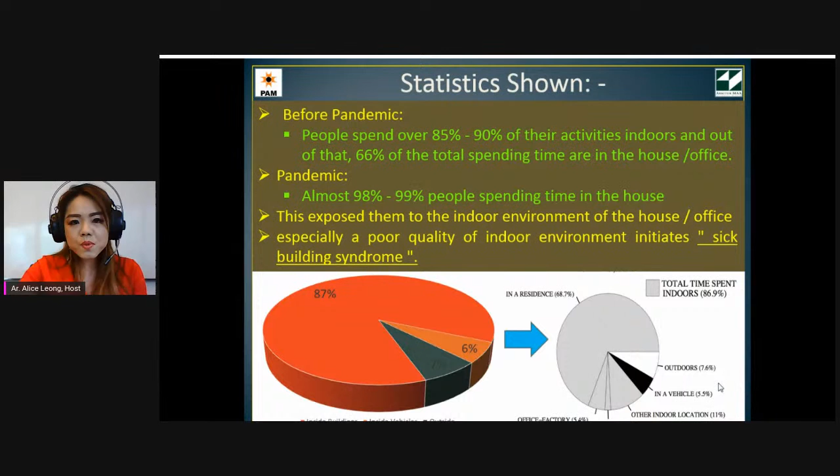So IEQ is called the indoor environment quality; it's a little bit different from indoor air quality, IAQ. We're talking about the environment, so it encompasses a much bigger scope around the area that we are living in. So let me explain that. Previously, we were maybe looking into 5 criteria that we have to control to make sure we are comfortable in the areas that we are occupying: the sound quality, the light quality, the comfort, the air, and the odour.

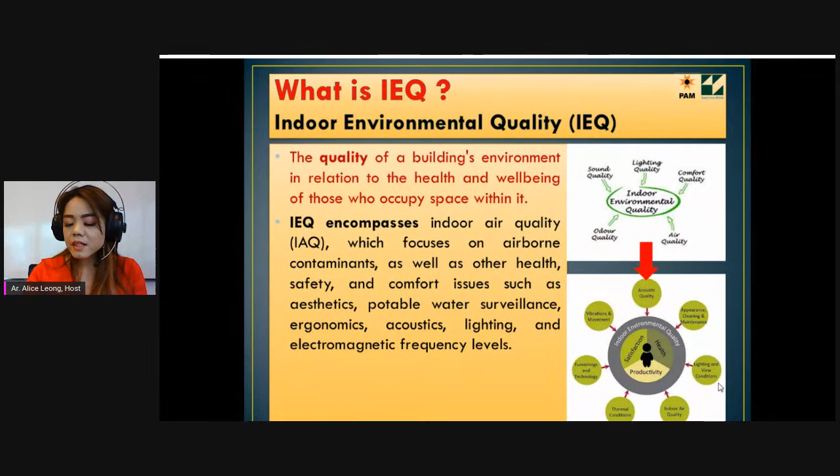So we also realize that people start to talk about including electromagnetic radiation in the IEQ, how to shield it away, because we know that nowadays with the technologies that we have, every single element, especially electronic items, actually comes with radiation, and it's just a matter of how it can create a negative impact towards our health, and so on and so forth.

So the impacts of poor IEQ, we know that previously it caused, and it still happens, that if you are in an environment with very poor IEQ, you will get skin rashes, sudden itchiness and fatigue, and then you feel asthma. You did not have asthma before, but suddenly you got it after that. And then eye irritation, discomfort, and then you have what we call sick building syndrome.

So sick building syndrome is when, especially in the office, one person catches the flu, then it's followed by a few more. You can see one guy get MC followed by a few others. That means the working environment or habitable area actually suffers from very poor air circulation. It's one of the elements in the IAQ. So improving the IEQ today is very crucial to help minimize the future impacts in terms of health risks, energy demands, energy costs, and also air quality.

So I've been putting in more elements because of this COVID-19 and many more things that alert us to wellness as a priority. Previously we captured daylighting versus the heat gain from sunlight getting into the living area, the views versus privacy: certain areas need to be more open to the external view, certain areas require privacy, and natural ventilation always versus external pollutants, insects and noise.

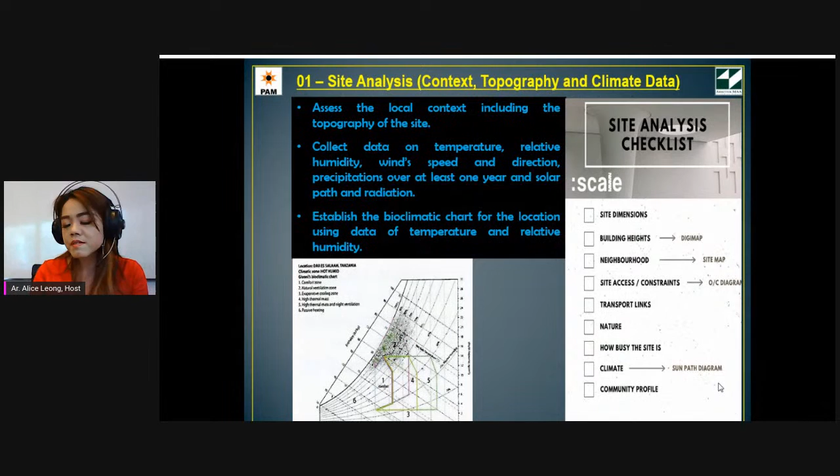But it doesn't mean that we can totally eliminate the air conditioning system. Especially in this modern era, our buildings have become more and more advanced, and things are based on the functions of the building. Certain areas really need a certain system to support them. So it's very subjective, depending on the functionality of the building itself and its purpose.

The next one, again, building orientation is very important. Of course, certain sites that you get are very limited and constrained in your choice of building orientation. You know very well that a building facing north-south is the best to get a more cozy area, and east and west are the areas that you try to avoid. But what if you can't? Then we have to put in other elements, which I will share in the next few points, that help to enhance the overall thing.

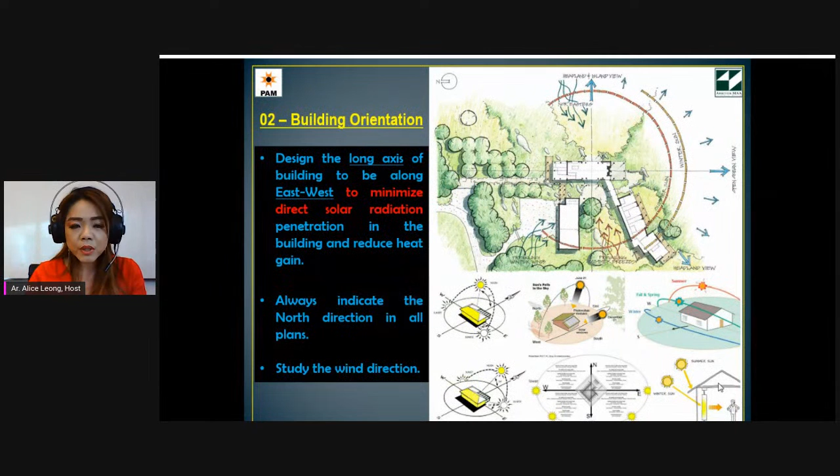When we talk about IEQ, we are not really just 100% focusing on the indoor. To get a very comfortable indoor area, you must take care of it from the beginning when the design starts. That's why I want to touch on this. From the macro, then you come into the micro. Then everything relates and will give you the result of a better IEQ.

For the building footprint, for those who are not designers, the footprint means that on the site given to you, you don't, like a typical layman, just build on 100% of the site that you have. I'm sure you saw a lot in the neighborhood. They keep extending their car porch, some even up to the boundary or even a little beyond the boundary. Practically, it doesn't really work that way. That's why we need to control the overall building footprint.

The best is always you build 60% and leave 40% as open area. That helps the overall environment of your living area, whether you have a landed property or a high-rise building. That's the reason the authorities always use the term plot ratio. Plot ratio is a way to also control how your building footprint is built.

It always comes with a purpose, and the way you arrange your building footprint also plays a very important role, so that you can put the nice private outdoor area in the orientation that you want, and certain areas you may want to make more of a public area. You can plant some trees or whatever it is.

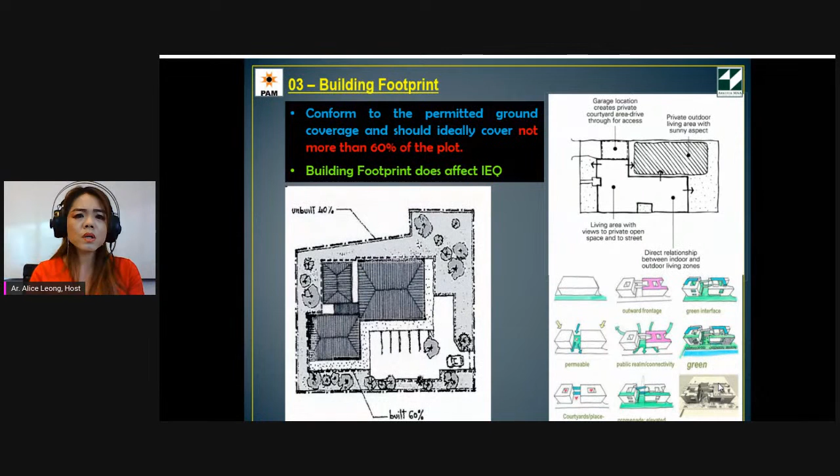At the same time, you actually create balance of the small little ecosystems in your own lot. So each of the lots itself plays by its own ecosystem. Before built, the ecosystem worked very well, but when you build, it is definitely affected. So the building footprints also come into the picture to balance off what nature has been doing, so that we try to minimize the so-called heat island effect as well as flash floods, all these natural problems.

So again, the shape of the buildings. In Malaysia, our criteria actually fall under the hot humid climate. We are not in a hot arid climate. Hot arid climate is more like certain countries like India. In certain areas, when it's hot, they're very hot, but at night the climate goes extremely cold. So in Malaysia, we are actually in the zone called the hot humid climate.

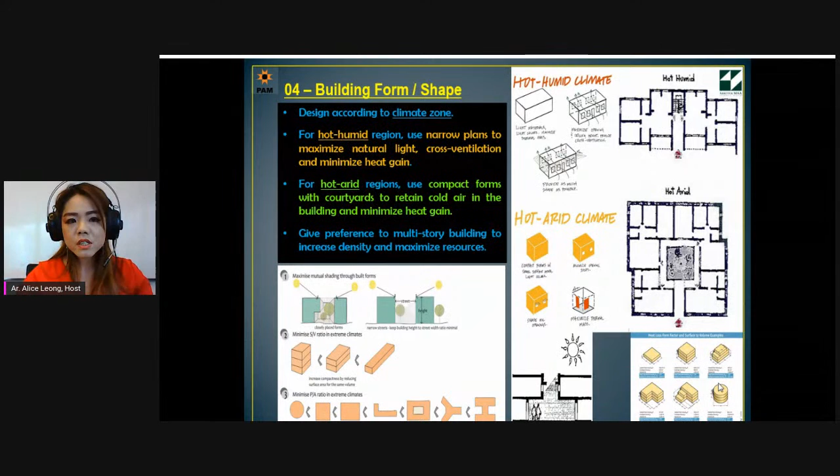So when you know very well and understand the climate of your own local context, then it's a lot easier for you to plan your whole entire building, how the openings should open and from which directions, and how the building shape itself should go, whether it should be elongated or more squarish, create more courtyards, so on and so forth. So planning the spaces within the habitable areas of the building is very important also.

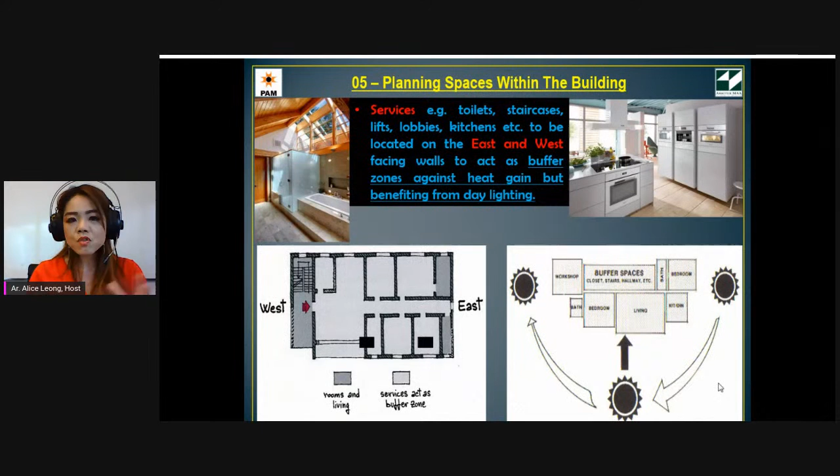Like I said before, the north and the south are always the areas that we want to occupy for more activities, especially in this pandemic. So normally when we design, we try to plan the areas such as the toilet, the staircase, the lobby, the kitchens, and put them in the east or the west of the building. Those act as buffer spaces, so that the north south area you can use for your living, the areas that you spend time in, you work in, and most other activities as well.

So again, coming to the openings of the building itself, we always emphasize that the ratio of the window to the solid wall cannot exceed 40%. It depends on your opening sizes. So if you can't avoid it in certain buildings and still need to use glazing or certain materials, try to use very high performance glass or high performance walls with a very good U value or R value that will treat the entire envelope of the building.

When the entire building envelope has been well designed, that will help to reduce the heat gain, the glare, and all the unnecessary discomfort elements into the areas where you actually work and do other activities. So then you create a much better indoor environment yourself, and you do not need to spend extra cost and extra design on this indoor area.

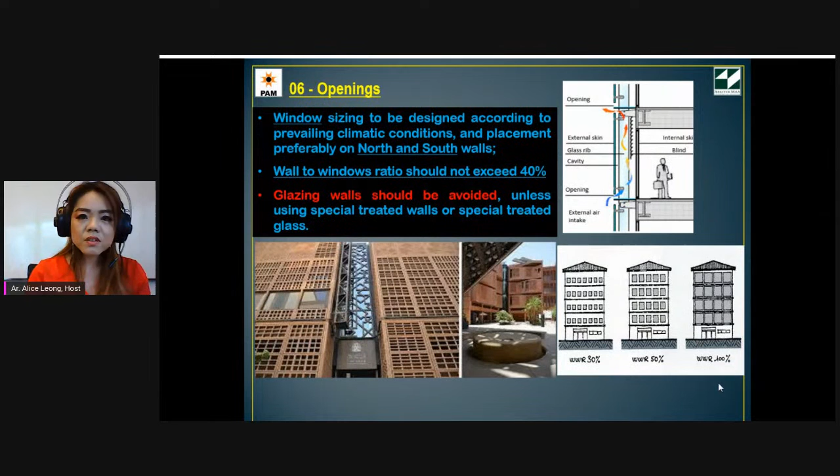It's just like your car. Those who have parked outside at 12 noon without a proper high performance tint on the car window, you open the door, you get in, and you know how it feels. It's really hot, like in an oven. So this is not what we want. It's the same concept for the building or the areas that we spend time in. We try to prevent the heat gain into the building, because once it gets in, it's very difficult to get it out. Prevention is always better than cure.

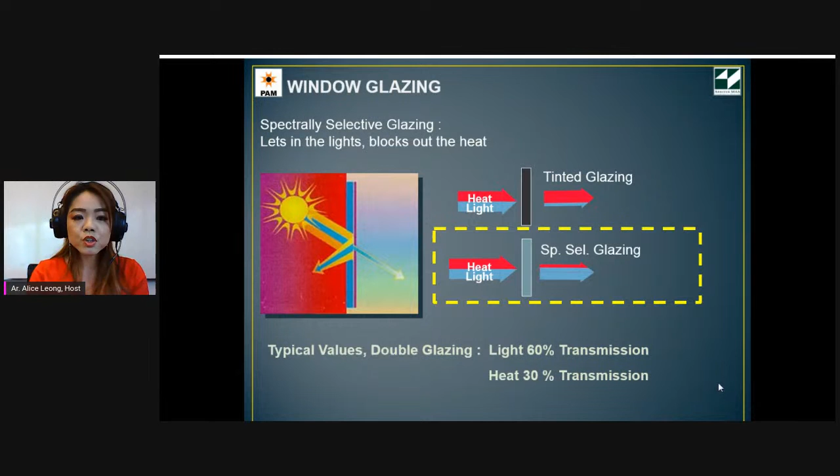So this is what I mean by high performance glass glazing. Whether the glass is tinted or not will give you different effects. By using high performance glass, you can eliminate the unnecessary heat gain into the building, but it does not stop the light getting through. We want about 60% light transmission into the building. That is free sunlight you can get, so you can reduce and minimize the use of artificial light during the daytime.

So another way is the way you arrange your glass glazing. There are many ways; it depends on the buildings, on the functionality of the buildings, what sort of performance glass you need to apply into the building. Certain glass itself is the same piece of glass, but you just turn it around and it gives you a different effect. In Malaysia, we are a hot and humid country, and we want the sunlight, as I said, but we do not want the heat, we do not want the glare.

So we have to arrange the uses of the glass in the directions that it will bounce back the heat to the outside again. But in a country that has four seasons, the same piece of glass they have to turn the other way round. Then they will get the heat into the building, especially in the winter. So it depends on which area, which country you are in. The design will be different. It could be the same material, but you just use it differently.

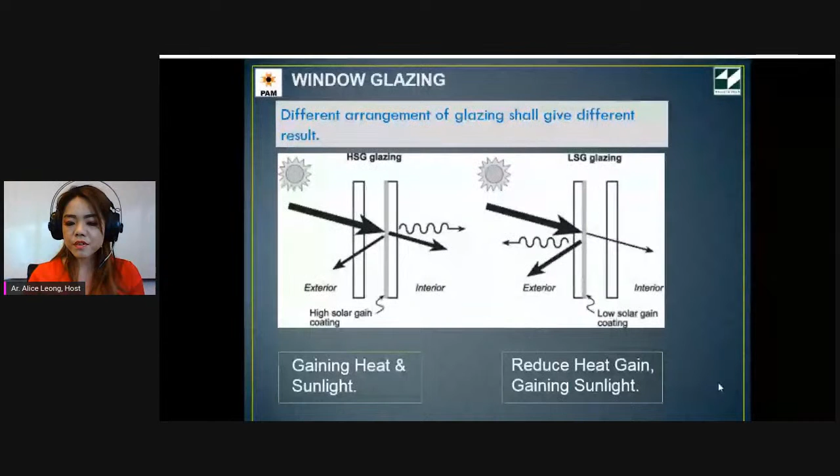So again, daylighting has been emphasized since a long time ago, when green building was introduced to Malaysia, I think about 10 or 11 years. But now in the pandemic, we are emphasizing it more. We want more daylighting, more sunlight, because now the time that we spend indoors is more than the time that we spend outdoors. We tend to do things a lot indoors already. I'm sure many of you are still working from home, taking turns 3 days or 4 days a week.

So it depends. When you start to work from home, you know which areas are lacking in sunlight, and you need to maybe switch on some lights to support your room. So from there, you know that the design itself, the room itself, is lacking in certain elements and criteria. So this is the awareness. I look at it more positively, that this situation actually makes us aware that the areas we inhabit need to be upgraded, so we can work and do our activities in a more comfortable environment.

So more daylighting, as I mentioned earlier, depends on your openings and the plot ratios of your buildings, and your orientation of the building, north and south. That helps in how you plan to harvest the sunlight into your building. But for facades facing the east and the west, you can have some shadings to eliminate the direct sunlight, the glare into the building, but you can harvest it indirectly into the rooms. That will help to reduce the irritation of the glare in the rooms.

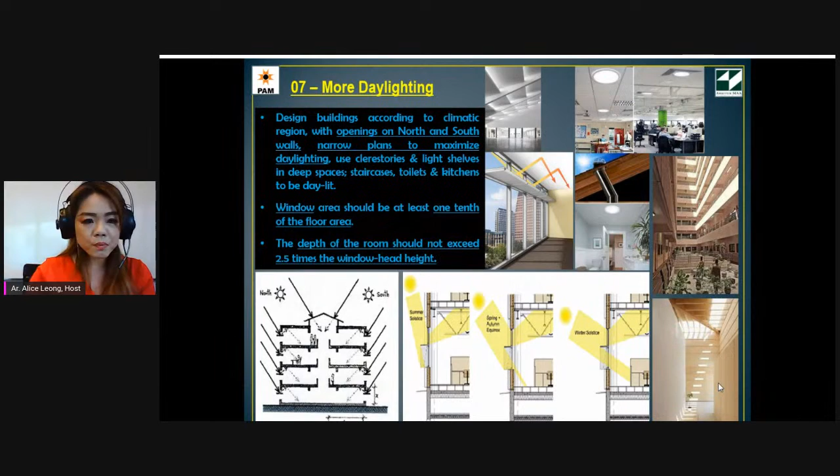So solar protection, in other words, is also called shading, or we call it a fin. It can be movable, it can be fixed. Other than that, we can also replace it with some vertical and horizontal green walls. Now you can see it's getting more and more common in our surroundings. But in our habitable areas, we really have to think about how to implement these elements wisely. It's not just aesthetics; the aesthetics must come with value when you install it correctly and it gives you the correct function.

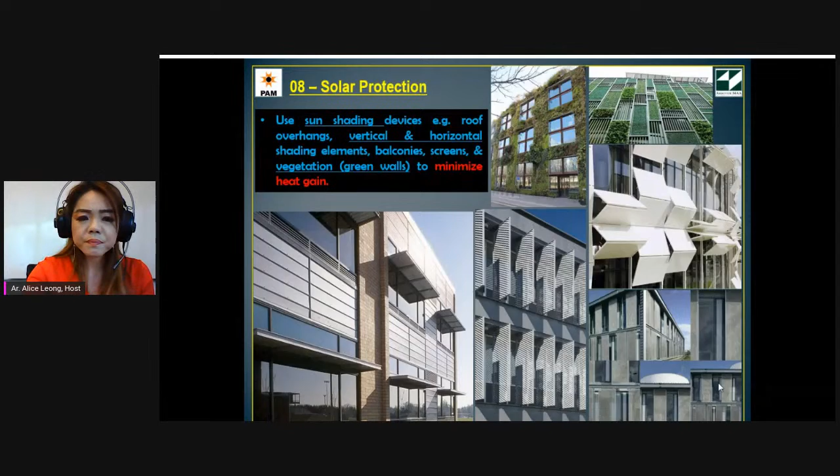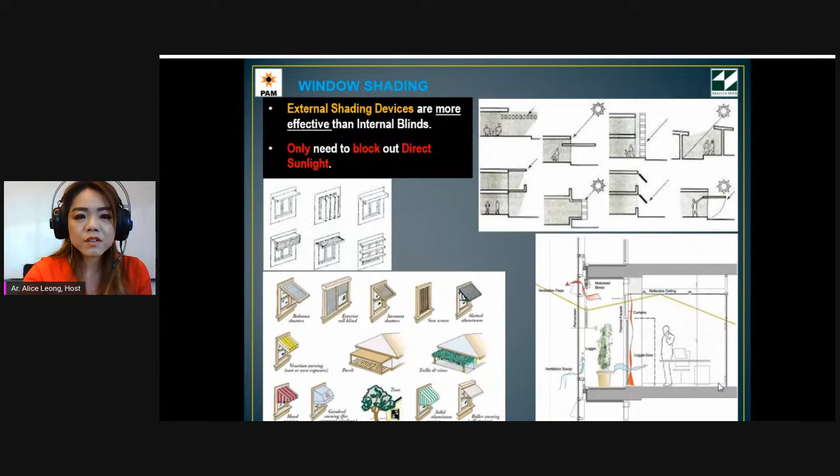So window shadings depend on how you arrange them in the openings of the buildings, and also the orientation. On the screen, you can see there are many ways of doing that. I'm not going to touch on that because it comes into the design details. The next one will be enhancing the natural ventilation, then later followed by others.

So in enhancing natural ventilation, we are not just talking about the window openings or the wall openings that bring cross ventilation of the hot air and the cold air. At the same time, we also have to include the roof itself. For houses, a lot are still using the pitched roof. So make sure the roof itself is a ventilated roof, meaning it's a breathable roof. You can also help by putting in some insulation.

So with insulation, outside there are many, what do you call it, thin layers of foil insulation that, I'll tell you, doesn't work at all. Even the insulation, if you put about 50mm, it won't really give you that effect. I've been visiting some housing areas where they really put insulation thickness of about 150mm.

I think that will really give you a perfect cool effect in the areas. I'm sure you've experienced this yourself, or maybe in some of your friends' houses, especially when they've done renovations. I've seen a few cases and experienced it myself, where they end up spending so much money on nice extension renovations for certain living areas, but in the long term it becomes a white elephant and nobody uses that area.

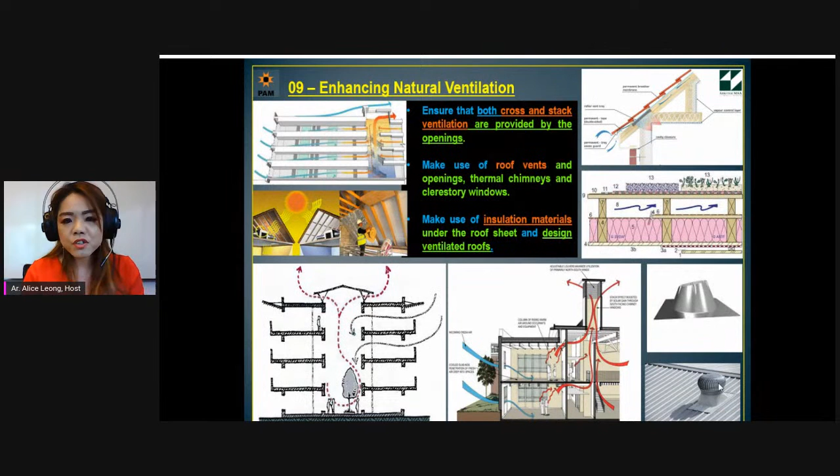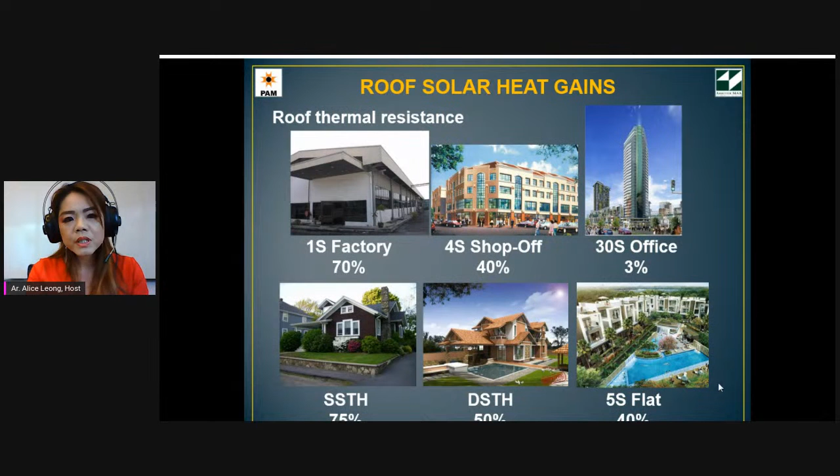The roof solar heat gain depends on the building. If you have a factory, shop lot, or landed property, we always emphasize that your roof coverage area is huge, so your roof needs to be insulated. But if you have a high-rise building, very slim and tall, the exposed surface of the entire building to the sun has to be treated, and of course the roof coverage becomes smaller. These are the percentages we always use as a guide for design, so you'll know that where the roof coverage is big, that's where you should put in the effort to insulate the entire roof.

Cooling itself is not just about using natural ventilation, we also have other elements to help enhance the entire living area as well as the IEQ. We can use water bodies to cool down areas, not just externally but also inside your living area. But you have to use it very wisely - it's not that you simply put in a water feature and it gives you the effect.

I've seen some areas where they've implemented water features, but the effect is not cool at all - when you pass by, you don't feel the cool effect, but the opposite. So before putting in any water features, especially in externals like big huge parks, I suggest a proper and thorough site analysis, and also the ecology and topography around has to be studied in detail, looking at the building surroundings as well as the climate itself. Because each building, especially high-rise buildings, when you build it up, it will affect the ecosystem itself.

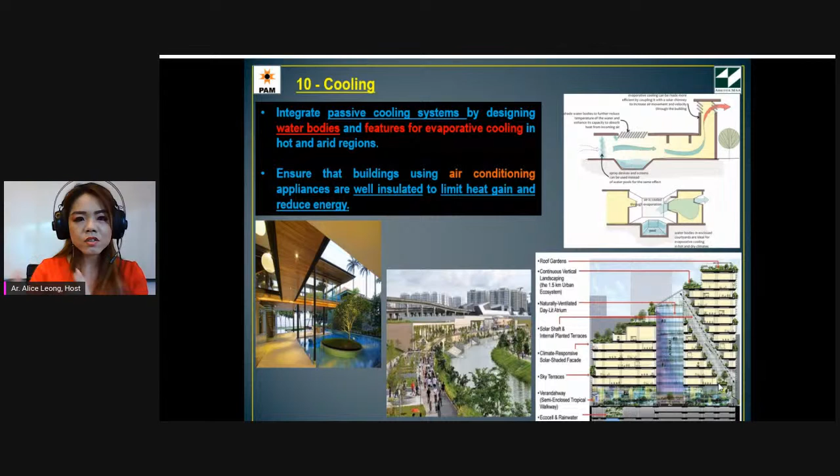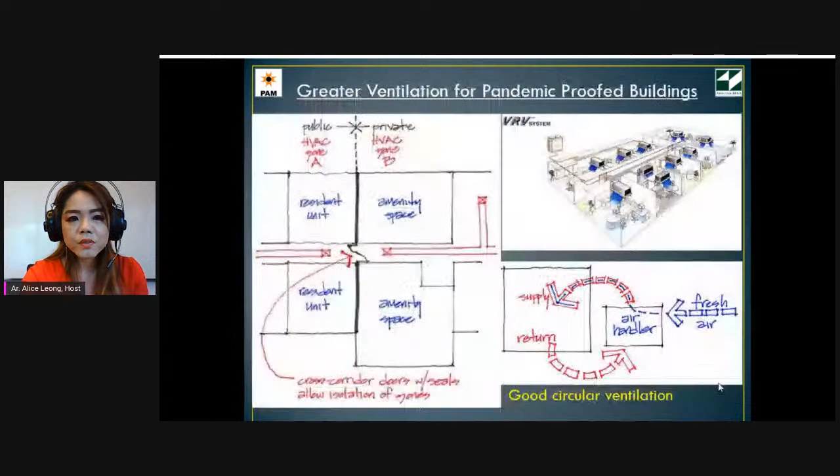So this is the way how some of the concept that you can use it for your indoor area. And of course, besides emphasizing on natural ventilation, we also have to think of the areas that you can't avoid, but have to use some aircon systems or artificial systems to help enhance the indoor environment quality. So in this pandemic situation, we have to really emphasize on using greater ventilation systems. I call it high performance HVAC systems for pandemic buildings. The concept of it, I think Damien can share later, because he's much more expert than that, he can explain much more.

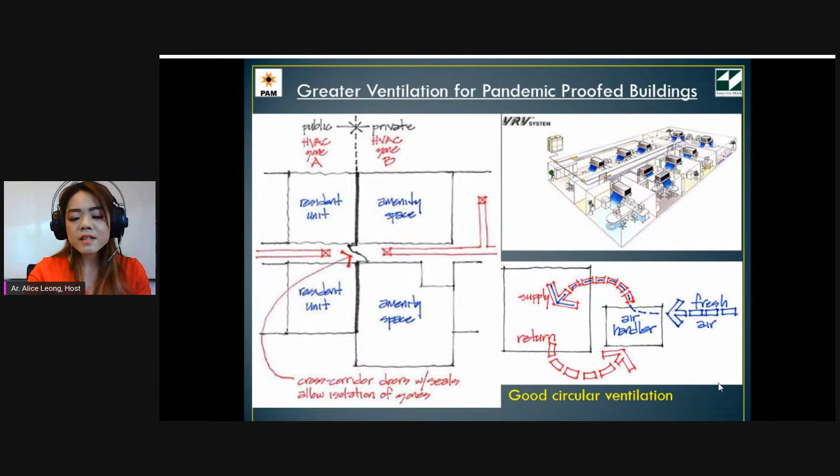So I'm just basically touching on that. This is roughly a concept that is really emphasized, it works as well as our passive design. It's always emphasized on good circulation of your ventilation, whether you use technology to help circulate the ventilation or by natural crossing. The planning and design itself must be right, so then you get the right effect to your entire living area.

So the next one we are looking at is the building envelopes and the material itself. Previously we've been talking about how we emphasize using material which is certified and approved by the local authority, especially like timbers, and we emphasize a lot on recycled and reused material. But right now, because of this pandemic, we've started looking into other enhancements or add-on points, such as it has to be easier to clean, wipe, and sanitize.

When you are staying in a certain area, sanitizer has now become part of our daily elements that we bring all around. You wear gloves, you wear masks, all these things. So areas like that, and equipment in the office, the material we use for our daily life really has to be considered, including your living area. So we always look for materials that can help us ease our maintenance. We always call it easy maintenance, easy to clean.

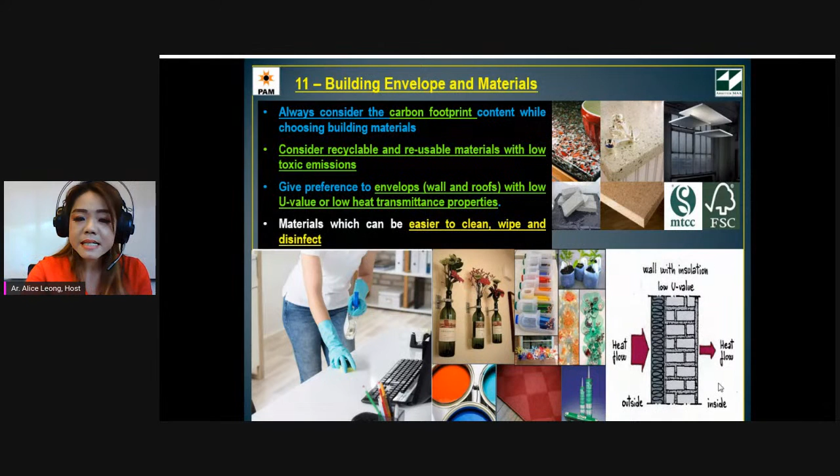So of course, when we talk about IEQ, we also talk about very good acoustics. It gives you a very comfortable environment. When you talk or do certain activities, the voice and whatever will be properly absorbed into the materials itself, rather than bouncing back and giving you echo effects.

Another thing is from inside also to the outside, the external finishes. So the finishes for external and internal are equally important. This includes not just the material itself but also the color you choose. We always emphasize going for lighter colors. Lighter colors in theory bounce back most of the radiation or heat to the natural areas. But if you use darker colors like black, dark gray, and anything darker, you absorb more heat into your living area.

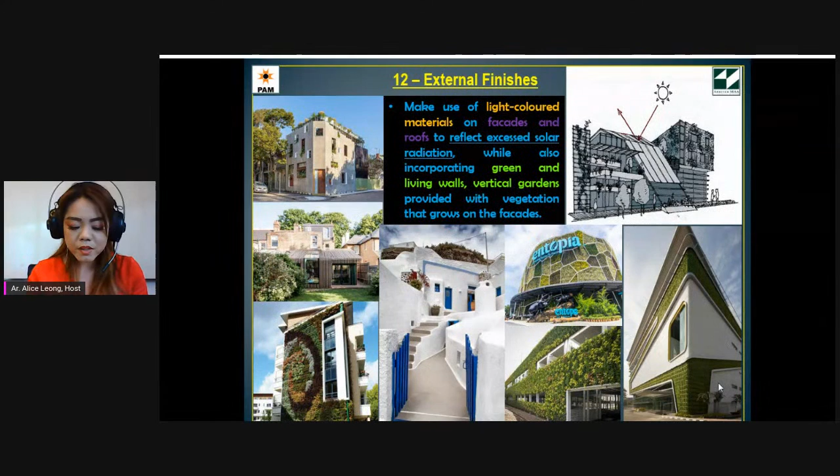That is the thing we do not want, because it's just like wearing clothes. If you wear black clothes and stand under the sun for, I bet, 1 minute, you'll feel the whole heat actually absorbed into your body. That is the discomfort we want to get rid of. So the same thing applies to our buildings and living area as well.

Same for the roof itself. Most of the time we also use what we call solar reflective materials, either for the roof, for the wall, but also for your landscape area, especially the hardscape area, meaning the pavers and pathways that we walk on. These are materials we always select, and we always advise other consultants and construction players to try giving a combination of brighter material. If you want some coloration, say gray, we want the matching coloration to contain more of the whiter elements than the darker elements.

So for the roof itself, same thing, we always opt for brighter color, light gray versus dark gray, things like that. And for your wall, we always go for lighter colors, white or very light gray, rather than very dark colors. Darker color may give you some designer feel, but you also have to think of heat absorption into the building. So if you have these kinds of things, then we have to think about how to actually bring the heat out from the building envelope before it gets into your habitable area.

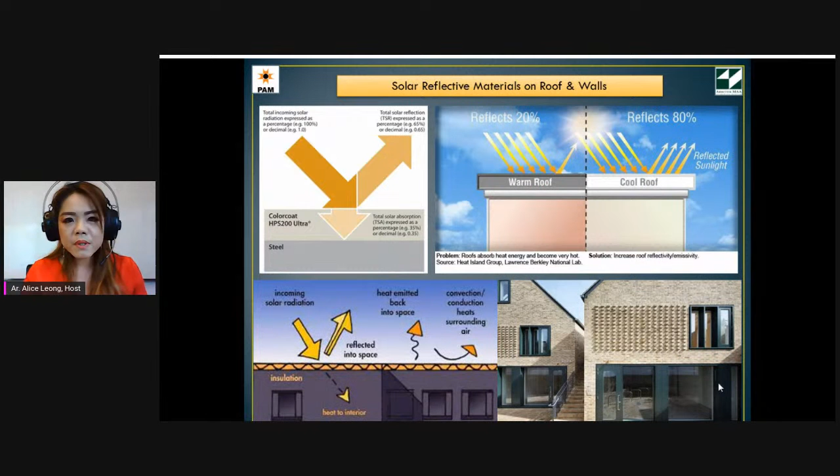So again, come to renewable energy. Solar actually is not a new thing. It's a very common item, but it's about how we play our part smartly to use solar panels, not just to help us save electricity, but to smartly implement solar panels in our house area, office area, or any other commercial areas. It helps in terms of cost cutting, and this element itself is not so expensive compared with years back.

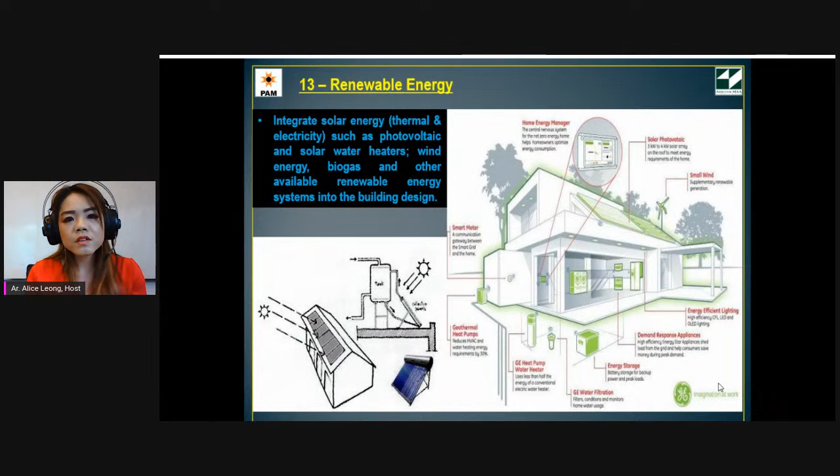For the electricity tariff, we can always talk to the TNB authorities to see how the benefits, grants, or incentives can play along.

So water is also another very important element, especially in the pandemic. Last month, almost the entire KL Klang Valley suffered a shortage of water, especially during this pandemic where we emphasize you have to keep your hands washed, hygiene and all these things. So imagine without water, what are you going to do?

So water plays a very important role in our daily life, in the IEQs as well. I break it into three criteria: a rainwater harvesting tank, how you harvest your rainwater and use it for certain daily errands; recycling of grey water, which helps save some water bills and costs in a more sustainable way; and being smart to select high water efficiency appliances.

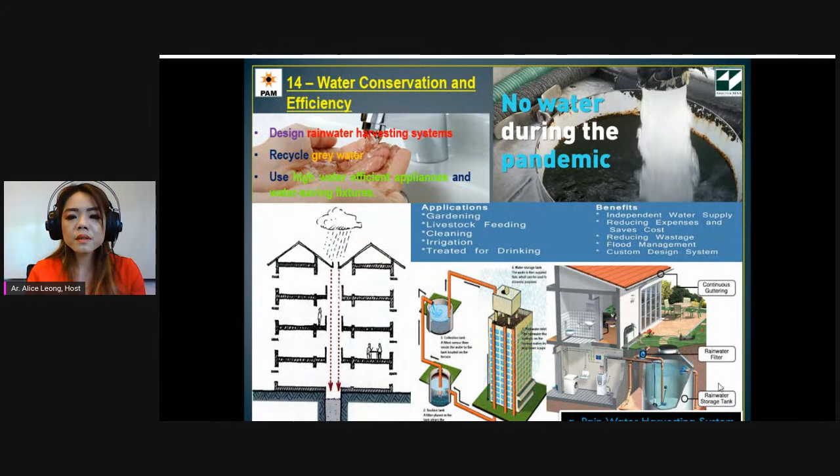For the rainwater harvesting system itself, we need not spend a very expensive amount for this particular system. In some buildings, especially PAM building, we also have this rainwater harvesting system, and it's proven that when most areas have no water, the building itself has sufficient water for other usage. For houses, we can also use that, but by incorporating good quality water filtration, it can be used for other better activities.

So grey water is the water you use after washing your hands, cleaning your plates, or taking a shower. This is water we normally discharge directly to the externals, but we can recycle and use it for other purposes. For instance, you can recycle and use it for irrigation, watering your plants, things like that. After washing your hands, the water isn't so dirty, so you can use it for cleaning your car or washing the floor, whatever it is.

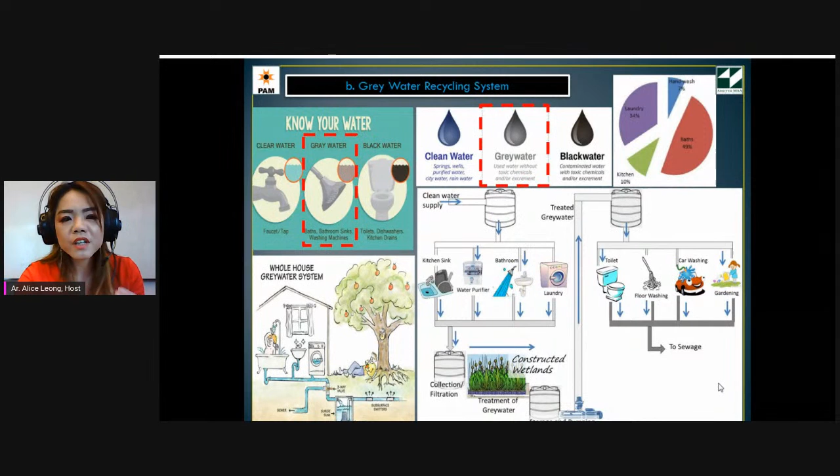It depends on how you're using it, but definitely it's not for drinking. Grey water is definitely not for drinking. We normally use it for irrigation and other purposes where it's okay, not needing to be 100% clean water.

The use of very high efficient appliances also helps you save in terms of water bills.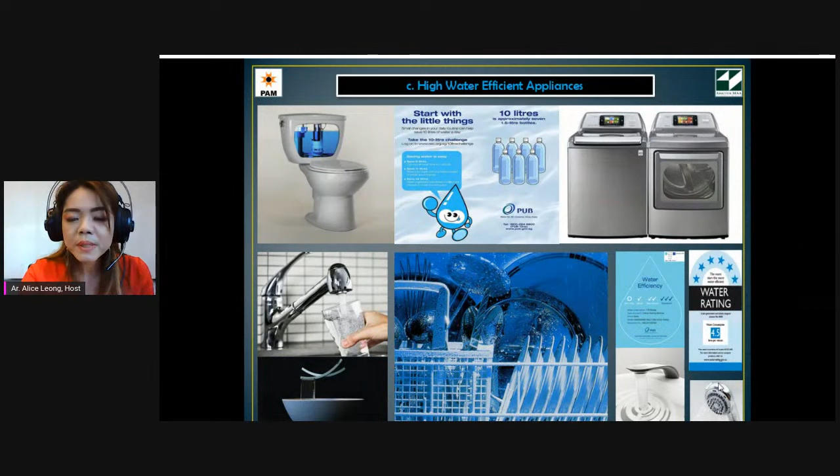In this pandemic, everybody suffered, not just from movement restrictions and distancing, but the biggest impact on the entire world is our economy. Everybody is going through a very tough life, so we try to use every item very smartly. Every single penny counts, including water. Even though water bills in Malaysia are still considered cheap, we have to use it wisely so we don't waste the resources we have.

The last point will be the efficiency of solid waste management. We're talking about rubbish, and I'm sure during the lockdown or MCO period, you realized how much waste was produced by each family household. When your garbage bin outside is full, you're waiting for the collection truck to come. These are the systems we want to upgrade already, so now we're talking about a lot of things being done through technologies.

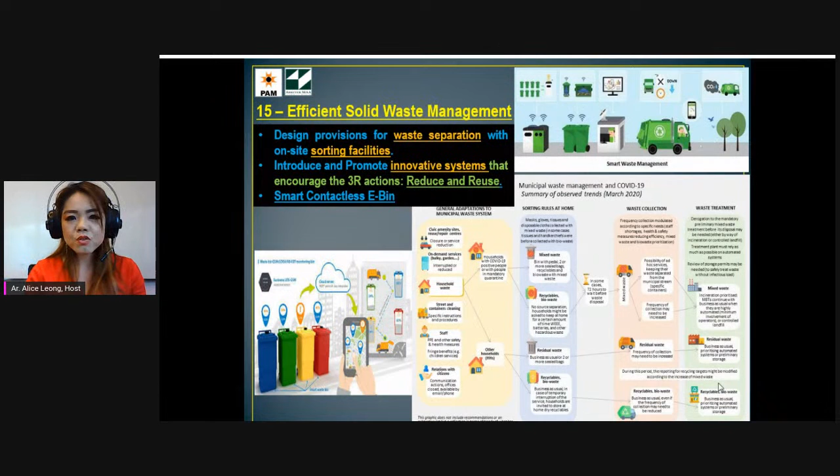We are talking about contactless e-bins. Other advanced and developed countries have been using that. So I think in Malaysia, we should also look into this criteria so that we can manage our waste smartly, especially for people who stay in condominiums. So the garbage rooms, how you transfer your garbage into the refuse chamber is very important. And then from the refuse chamber itself, how your garbage can be transferred to the truck.

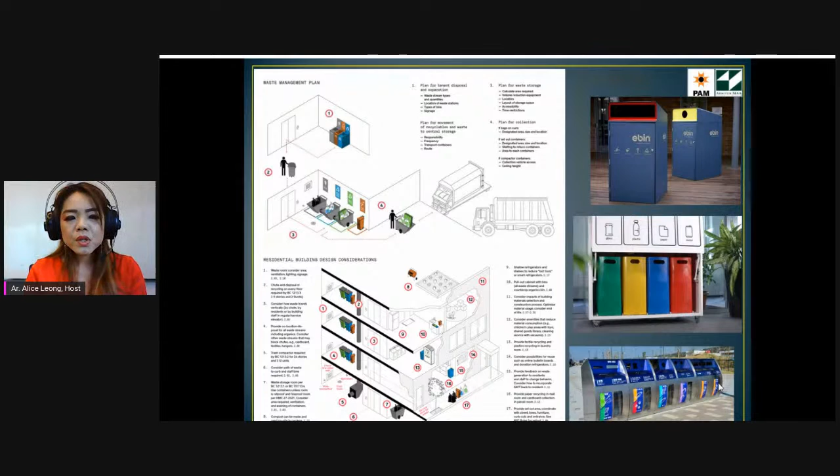So some technology has been coming into play, IoT, as I mentioned. So this is the area where we have to work together with the stakeholders as well as the policymakers to enhance the entirety of our country here.

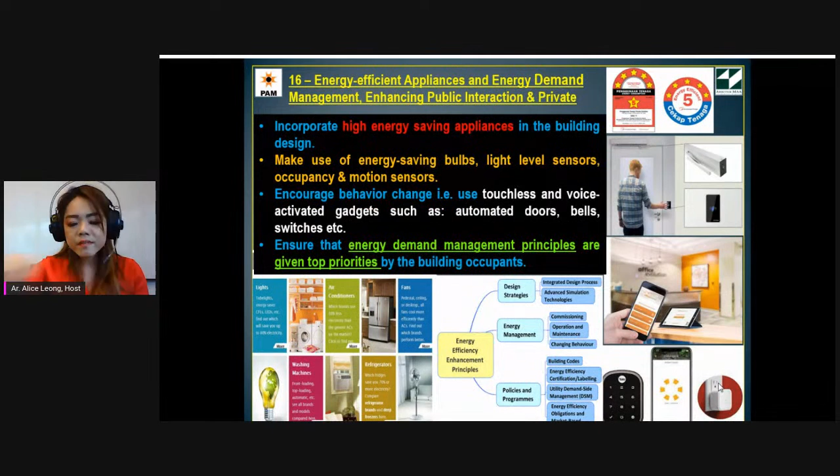The next one, last but not least, is the electrical appliances. Right now, because of this pandemic, we are also talking about contactless, touchless; as long as we don't touch anything, we feel very safe. And we also try to minimize the chances of having to keep spraying hand sanitizer onto our hands.

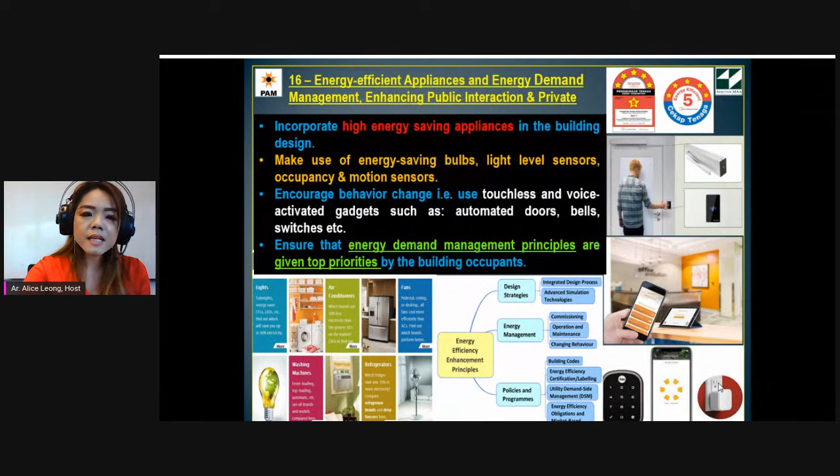So what we're trying to do is use technology, the apps, contactless, face scans, thumbprints, your heat, your voice command. These are the things that we are looking into implementing in our indoor and house living area. So it can enhance everything from public interactions to private interactions.

So I think that's about it for today's sharing. Looking at the whole thing, the COVID-19 pandemic actually leads towards rejuvenating our world. Looking at it more positively, it actually brings us towards a better living lifestyle. So thank you very much.

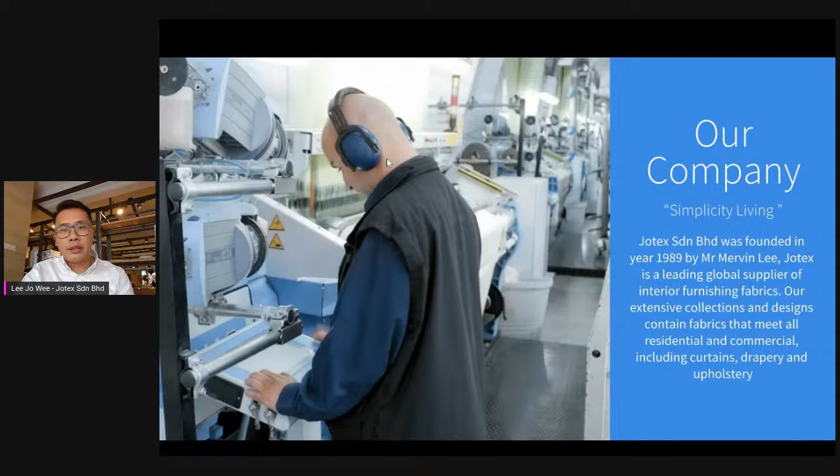We are from Jotex. Our tagline: Simplicity Living. So let me go through our company. Jotex Sdn Bhd was founded in 1989 by Mr. Mervin Lee, my dad. We are actually a leading global supplier of interior furnishing fabrics. Our extensive collection and designs contain fabrics for all residential and commercial uses, including curtains, drapery, and upholstery.

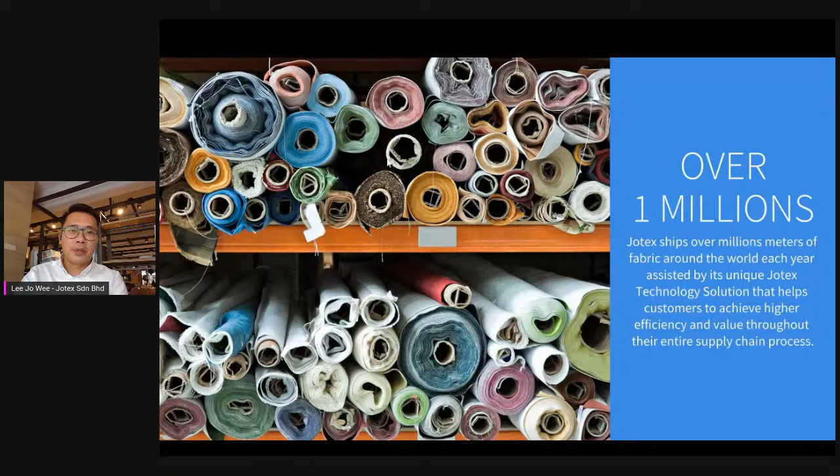We sell over 1 million meters of fabric annually with our unique Jotex technology solution that actually helps our customers achieve efficiency and value throughout the entire supply chain. So basically, we can reduce the cost and also speed up the process of delivery. We are now in 10 countries.

Our fabrics are distributed to more than 1,000 curtain dealers, interior designers, sofa and furniture manufacturers, and the hospitality and healthcare sectors as well, across Malaysia, Australia, Singapore, Cambodia, Hong Kong, Myanmar, New Zealand, Thailand, and Vietnam. We are working closely with our partners, customers and suppliers, constantly enhancing technical knowledge and expertise, with continuous investment in operations and service to sustain and improve satisfaction.

So we are more focused. We are not just a textile company. We are more of a technology-driven company. So what we do is, from the process where we start designing our products with the colors, the pattern, everything, then we prepare the yarn for weaving. We select the machine, either knitting or weaving, depending on the quality we need. Then the color process with the dyeing, with the highest quality of inspection, then we deliver to our customers,

shipping worldwide, supplying globally. We have our in-house design studio where we design the construction of the fabrics, the colors, the material, the composition. And we work closely with the certification lab. We are certified with ISO 9001, the quality standard, and more importantly, the Oeko-Tex environmentally friendly certification, which is very important for health and the environment. I will talk about it more later.

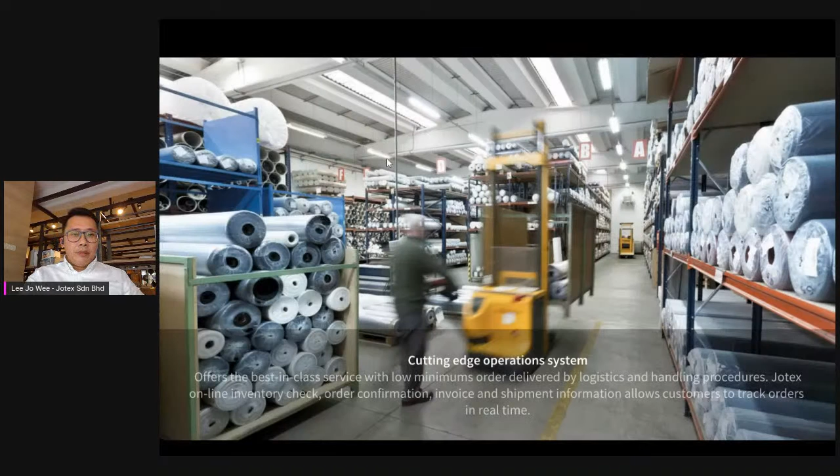We have a cutting-edge operation. Basically, we offer our dealers and interior designers low minimum order delivery using our logistics handling and procedures. So we have online B2B inventory checks, then the orders, confirmation, invoice, everything is automated. So customers can actually trace their orders online. This is the B2B system that we built to speed up the process.

Our marketing support: we provide dealers and interior designers with design, photography, room sets, image swatches, lifestyle, whatever they need on our platform. Our company basically has a passion for people. When we are united, we stay strong. We believe that a strong and successful company today has to have strong values, the principles that inspire us. So that is Jotex today.

When it comes to our environment and social approach, we are ISO 9001 certified, and our motto is that we care about our people and environment. Being green conscious, we endeavor to supply fabrics that are environmentally safe and not harmful to human health.

These are the very important Oeko-Tex certificates that prove that for the fabrics, across the whole supply chain, there are actually no chemicals from the yarn, from the weaving, from the dyeing. So these are the standards that we have to meet.

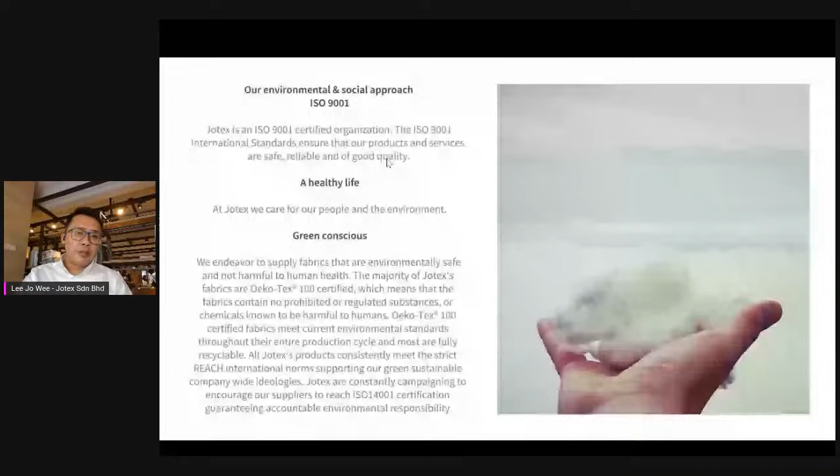And also these are the international standard REACH, certified by Europe, and we are also ISO 14001 certified, working with our suppliers to make sure everything from our final product to the end consumer is all environmental responsibility.

I think the line is not stable from Jo Wee's side. Okay, we're sorry for that. I think Jo Wee's line is unstable. So we get back Damien to the screen now. Damien? Yes. Yep. So I think Jo Wee could actually share more with us, but unfortunately today his line is a bit unstable, not a good day. Yeah, correct. I think I saw outside it's going to rain very soon too. Okay. Yeah. So no worry. I think we also exceeded the time a little bit, but it's okay. Maybe one more question for Damien.